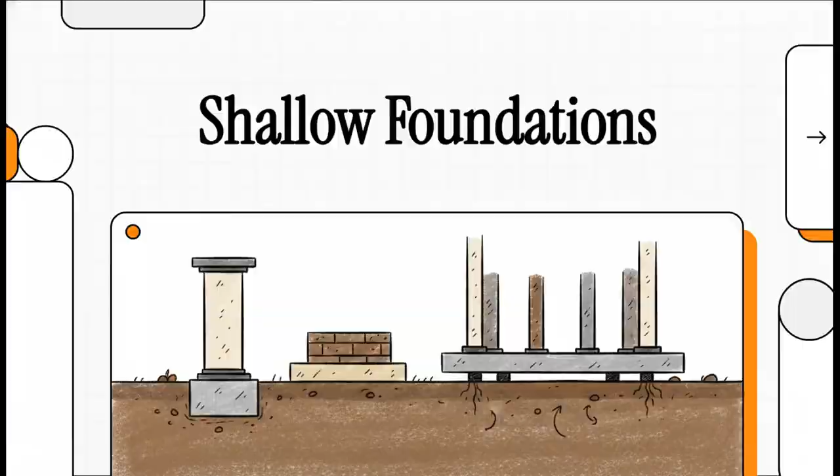We walk into towering skyscrapers and massive structures every single day, completely oblivious to the incredible, highly calculated science happening just inches below the ground we step on. So today, we're going to illuminate that hidden world. It really all starts with a high-stakes question. What keeps a massive building from just sinking right into the earth?

It sounds like a simple physics problem, but the ground is incredibly dynamic. Without proper, precise engineering, we face absolutely disastrous consequences. The entire structure of our built environment relies on battling two primary enemies: catastrophic shear failure and something called detrimental settlement. Basically, if the engineers get it wrong, the building either comes down or it slowly tears itself apart.

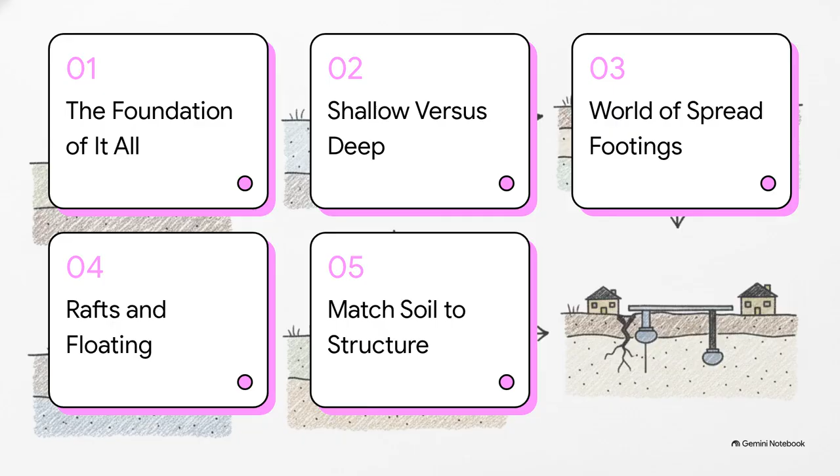So here's our blueprint for today's explainer. First, the foundation of it all. 2, shallow versus deep. 3, the world of spread footings. 4, rafts and floating. And finally, number 5, match soil to structure. All right, let's jump right into section 1, the foundation of it all and the 2 golden rules.

Okay, so it's absolutely crucial that every foundation rests on these 2 golden rules. First, it has to prevent shear failure. In geotechnical terms, this means stopping the plastic flow of the soil material. You literally cannot have the soil underneath the foundation being laterally expelled, essentially squishing out from underneath the heavy load of the building.

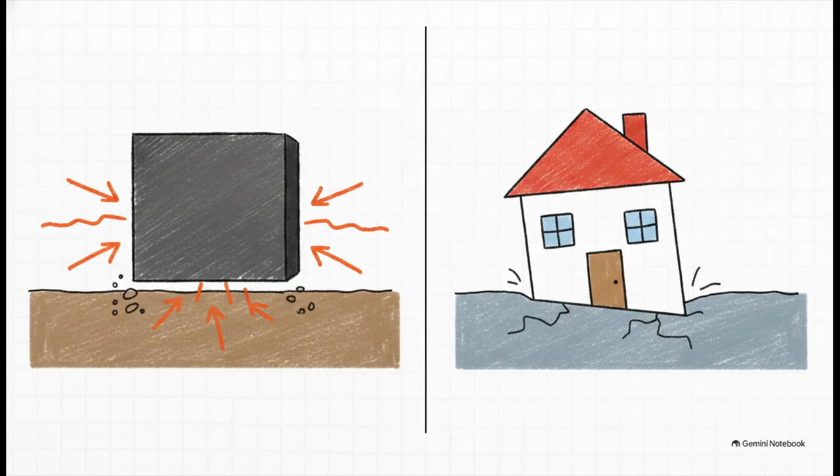Second, the foundation has to limit detrimental settlement. Now, a little bit of sinking is natural, but the anticipated settlement, both the total amount and the differential sinking across the building, has to be kept to a safe, tolerable magnitude. Otherwise, it destroys the stability of the whole structure.

Moving right along to section 2, shallow versus deep, and Terzaghi's rule. To define the line between shallow and deep, we turn to Terzaghi's rule. Karl Terzaghi was a massive figure in soil mechanics, and he came up with this wonderfully simple mathematical ratio.

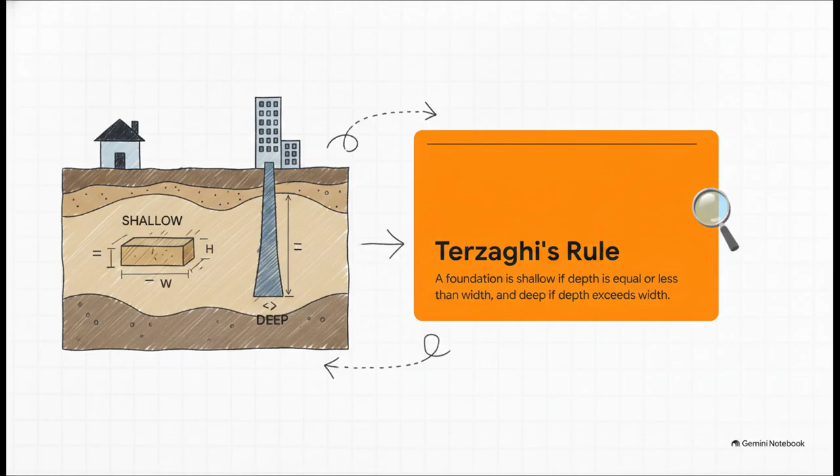He stated that a foundation is considered shallow if its depth is equal to or less than its width. If the depth exceeds the width, well, then it's classified as a deep foundation. It's kind of crazy how such a simple ratio defines these massive engineering choices, right? It's a really simple visual concept.

Imagine the horizontal width, we'll call it B. If that width stretches out further than the vertical depth goes down into the soil, boom, you have a shallow foundation. These simple dimensions completely dictate the bearing capacity theories that engineers are going to use to keep the building standing tall.

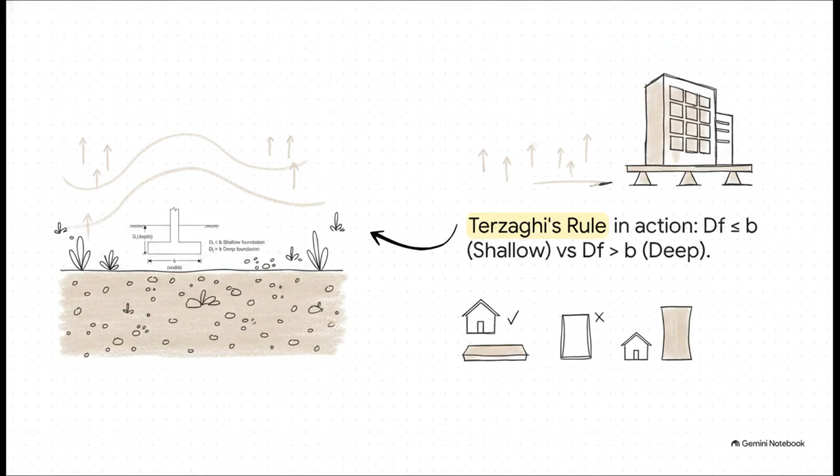All right, section 3, the world of spread footings, which are essentially massive structural pads. If we look at the whole geotechnical family tree, shallow foundations branch off primarily into spread footings on one side, and things like combined footings and rafts on the other. Under spread footings, they break down even further into continuous footings for long walls or isolated footings for single columns. It really gives you a sense of the toolkit engineers have at their disposal.

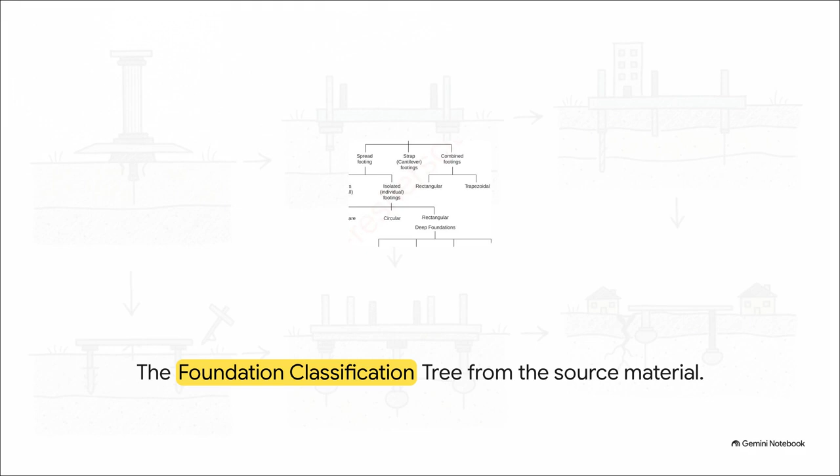So, what exactly is a spread footing? Essentially, it's a giant structural pad. Think of it like putting on a snowshoe. If you walk in deep snow in normal boots, your concentrated weight causes you to sink right in. But a snowshoe spreads that exact same weight over a larger area so you float on top. A spread footing does exactly this for a building.

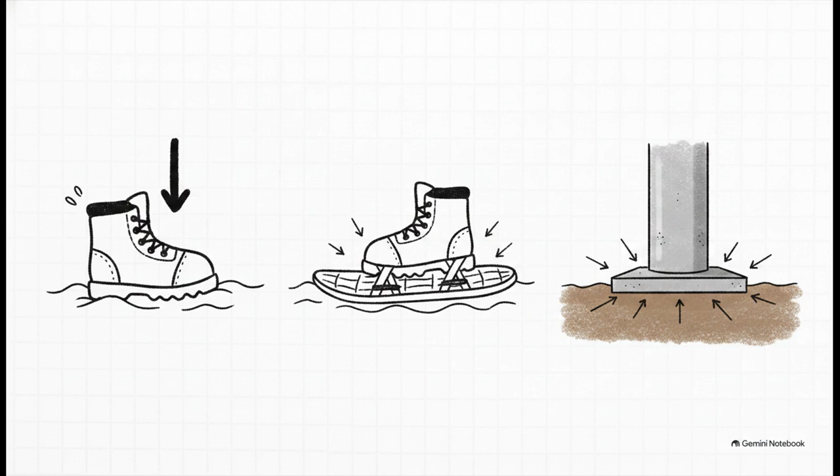It takes the massive load from a column or a wall and spreads it over a sufficiently large area of foundation soil. And these are usually constructed as close to the surface as possible, but safely below the frost penetration depth and away from the risk of soil erosion.

And engineers don't just have a one-size-fits-all solution for this. There are several common variations of isolated spread footings they can choose from based on the job. You've got plain or simple footings, mass concrete footings, which are typically used for steel columns, sloped footings, and stepped footings. The engineer carefully chooses the exact shape and variation based on the specific load of the column and the actual space constraints of the site.

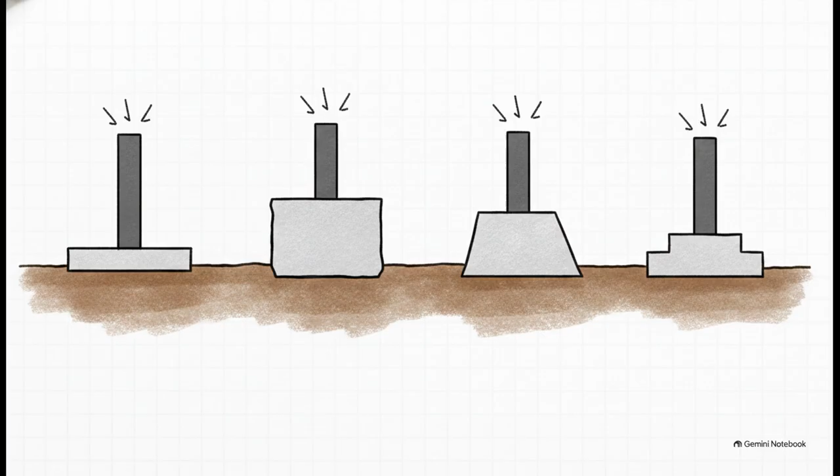But what happens when the ground isn't perfect? Often, the topsoil has totally inadequate bearing capacity. It's just too soft or unstable. Engineers obviously can't just put the footing on bad soil. So they dig down to the soil or rock that actually has adequate bearing capacity. Then, to bridge the gap back up to where the footing needs to be, they use either a lean concrete pad or heavily compacted sand and gravel. It's a really clever, practical adaptation to tricky terrain.

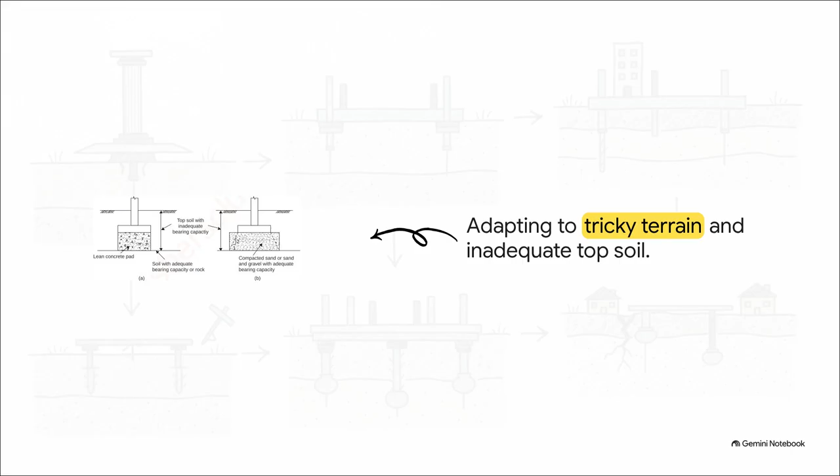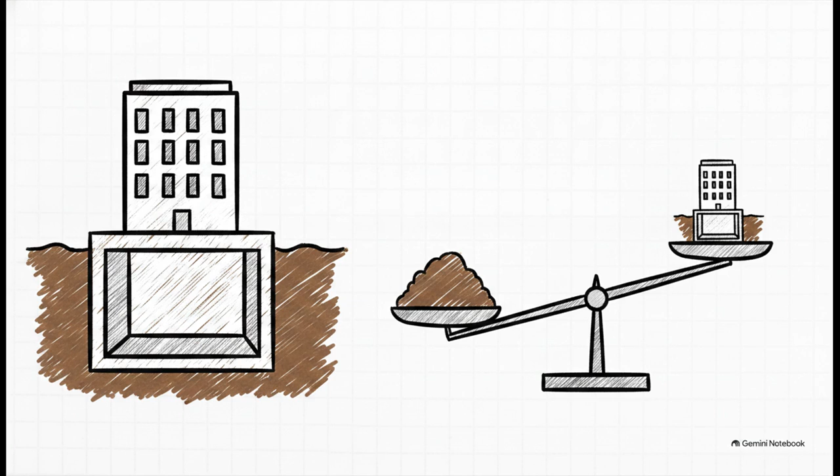Which brings us to section 4, rafts and floating in deep compressible soil. Now, when you're dealing with deep deposits of highly compressible, cohesive soils, situations where the ground is basically too soft and standard piles are just impractical, engineers turn to the floating foundation. And this isn't just a physical type of foundation, it's a brilliant engineering concept. They assemble a combination of a raft and a caisson to create a rigid box underground.

The magic here is that they excavate an exact amount of soil whose weight perfectly equals the weight of the new building. By doing this, the stress on the deep soil remains exactly the same as it was before the building was even there. The building is literally floating in the earth. No extra stress, no sinking.

Finally, let's hit Section 5. Match soil to structure. It's the ultimate engineering matchmaking game. Matching the soil to the structure involves some really complex decisions. If you have beautifully compact sand or firm clay extending deep down, you're in luck. Spread footings are your most appropriate and conventional choice.

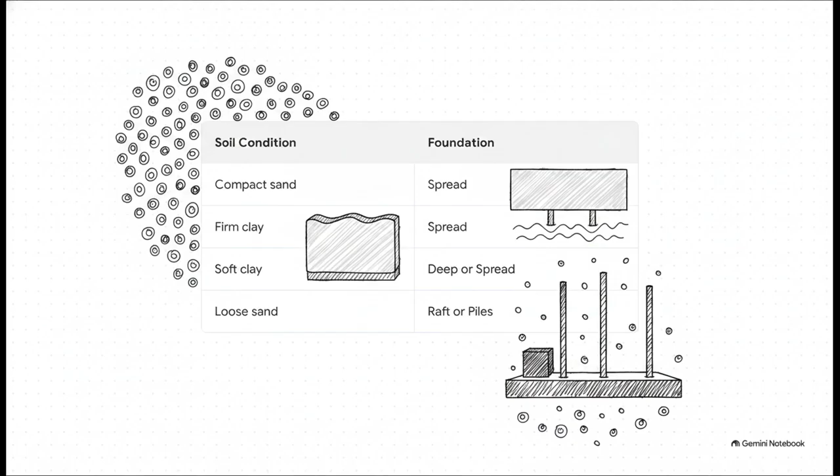But look what happens when you introduce soft clay. A spread footing might work if it's a light load, but a heavy load absolutely demands deep foundations. And if you're building on loose sand extending to great depths, spread footings will just settle way too much. In that case, you have to switch to a raft foundation, drive piles, or artificially compact the sand first.

So it all comes down to a comparison between shallow and deep. Shallow foundations, particularly spread footings, are the most widely used simply because they are the most economical. They require the least amount of heavy equipment, and engineers can easily inspect the soil right there at the surface.

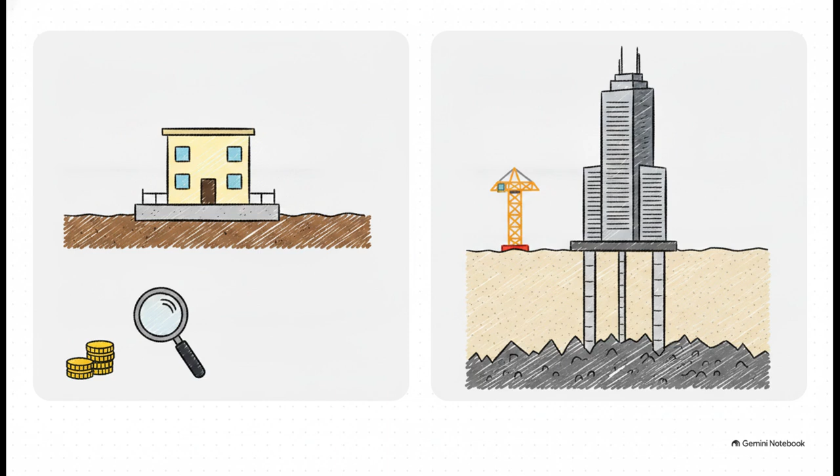Deep foundations, on the other hand, are strictly deployed when the soil has incredibly low bearing capacity, or when the sheer massive load of the structure requires you to entirely bypass those weak upper strata to find solid rock way below. Which brings us to this final thought.

The next time you walk into a towering building, just take a second and look down. Ask yourself, what exactly is the soil doing beneath your feet right now? Is a massive spread footing acting like a snowshoe to keep you afloat? Or is the entire building perfectly displacing the weight of the earth, floating in a rigid box of concrete? The invisible math and structure beneath us is just as fascinating as the architecture towering above us.